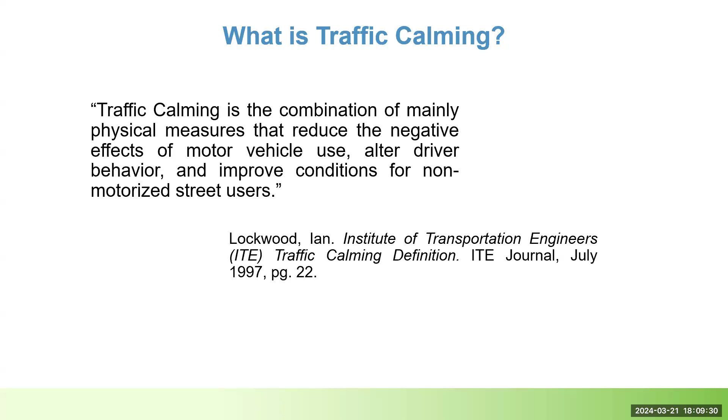The traffic calming program in Ann Arbor specifically is designed to provide residents with a formal process for engaging with the city in a partnership to perform a technical analysis of traffic concerns on local streets and then explore potential solutions using the fundamentals of traffic calming. The city has a 5-step program. Wade Trim is currently assisting with step 2 through a portion of step 5.

I'll briefly describe each of the steps, but there is a guidebook available online. You received a very tiny printed version of it in the mail with your initial package, but it has all the detail. If you'd like to review anything after this meeting, I'll direct you to the website a couple times throughout tonight.

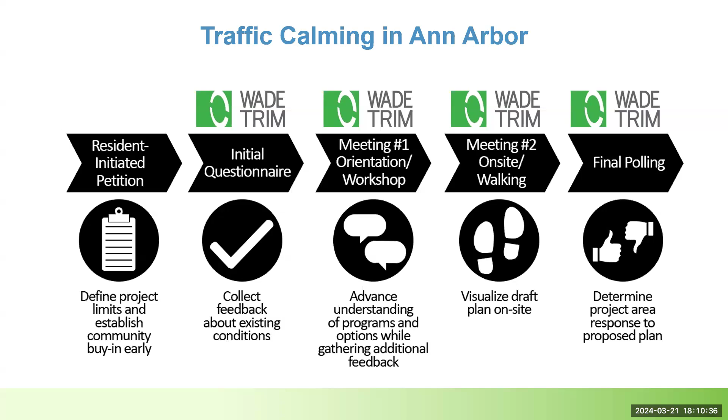So step 1 is the resident-initiated petition. For Mershon Drive, the project started with one of your neighbors acting as a petitioner, who submitted a request to the traffic calming program for Mershon Drive between Scio Church Road and Delaware Drive. After defining the project area, the petitioner gathered signatures from other residents who also live in this area. Hopefully you've had a chance to sign the petition and you're aware of the project and this effort since it initially went out.

The requirement for the traffic calming program to accept the request is that at least 50% of the defined project area must support the project, and also a preliminary technical study must result in at least 10 points based on the criteria that the city sets. Mershon Drive collected signatures from 76% of addresses, and the preliminary study resulted in 33 points. There's a breakdown of those points on our project website, but this project area is more than qualified to participate in traffic calming.

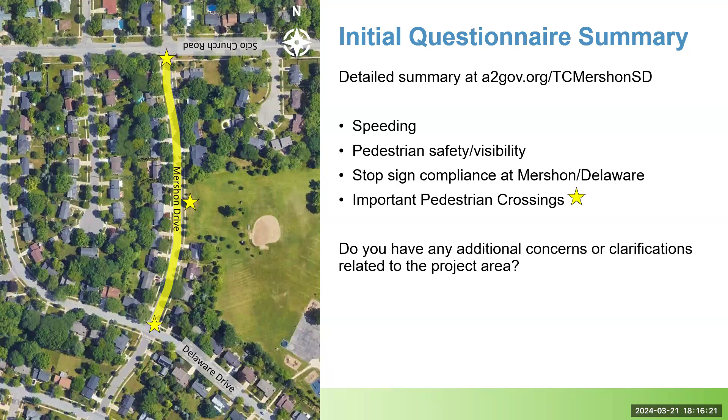Okay, don't see anything else. Keep moving forward. Oh, one more comment. Lots of kid traffic for the sports field. Oh, and walking to and from school. We've got the school nearby as well. So this is within a school zone. It's kind of cut off in the photo, but okay. So I think we've highlighted some of the main concerns with Mershon Drive.

So step three, that's where we are today. This is mostly orientation, so I'm going through how the program is going to work. But before we present the starter idea, we'll just go through an overview of the toolbox that is described in the program's guidebook. Before I do that, I'll launch another poll just to see how familiar people may be with the guidebook. If you had a chance to review it before today, or if you're just familiar with it, maybe from other projects that have been in the area.

Okay, so it looks like we're a little bit of a mix, but it seems like for the most part, people have at least been able to skim it, or if not, they're pretty familiar with how the program works. But we do have at least one person who may not be as familiar. I'm going to go through it regardless, but it's good to know.

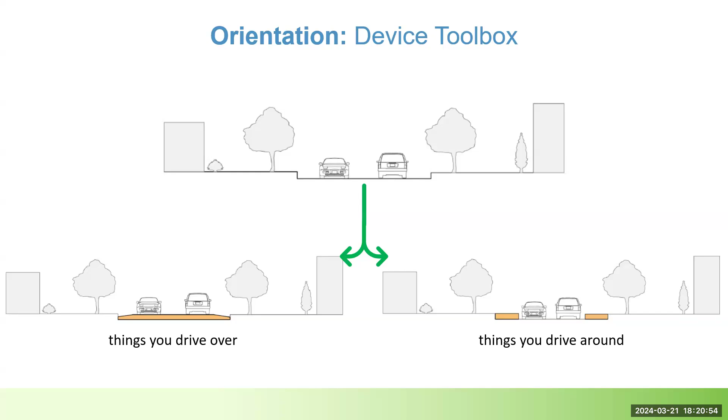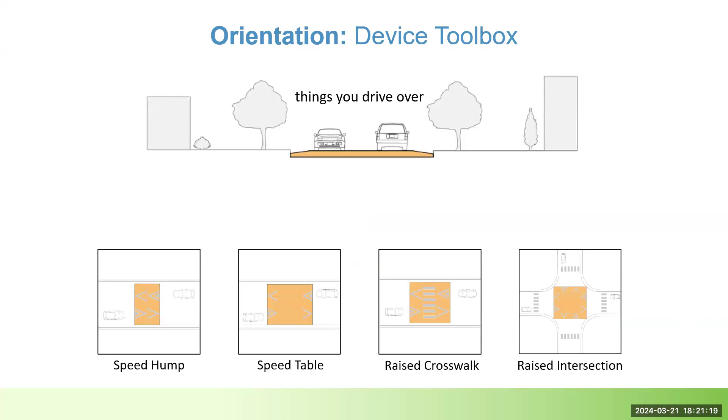So within the devices you drive over, these are devices that slow traffic by creating discomfort if traveled over at a speed exceeding 25 miles an hour. The device toolbox presents four devices that fall under this category: speed humps, speed tables, raised crosswalks, and raised intersections.

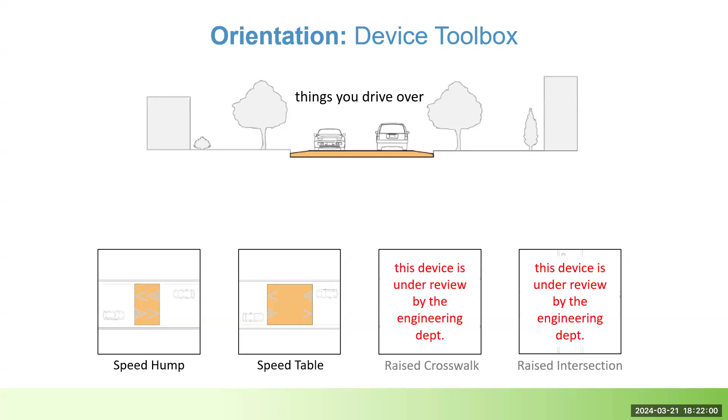Raised crosswalks and raised intersections for now are currently under review by the engineering department because we've been running into situations where we're not able to meet ADA guidelines, Americans with Disabilities Act. We're not able to meet those guidelines and make these crosswalks or intersections compliant. So for now, they're under review. Not to say that they won't be a possibility in the future, but for now, we're not able to propose these devices.

There are a couple other notes regarding speed humps. So that height, 3 inches, the maximum height, that's designed for the ease of bike usage and bike safety. I know there are examples throughout the city where speed humps were installed prior to that standard, and sometimes that's used as a reference. As of now, with the city standard, they will not make exceptions for that. The goal of a speed hump is not to destroy someone's vehicle, and at the same time, we have to balance safety for all road users, including bicycles.

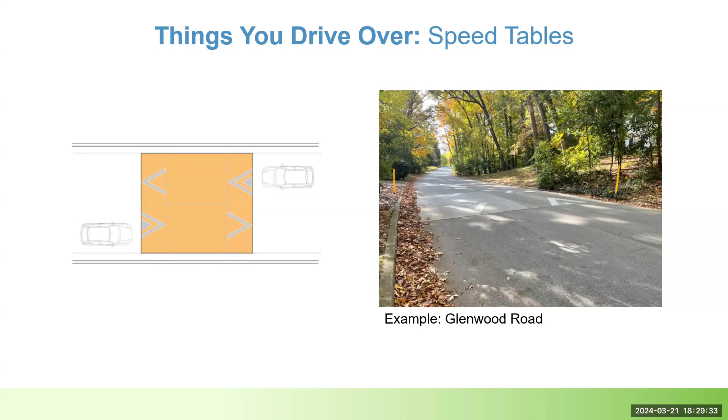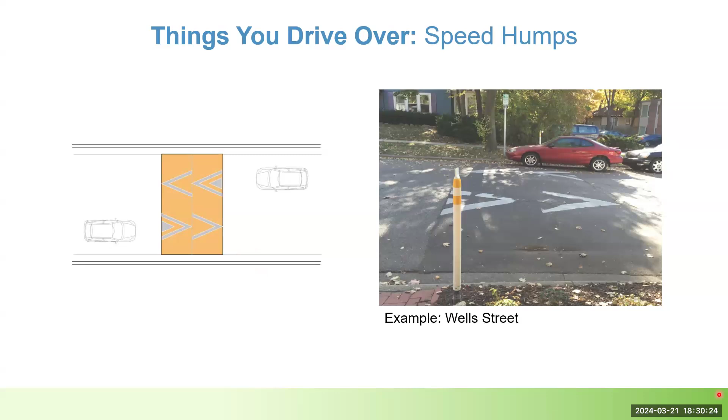And then I'm sorry, Bob and Jan, I didn't know if there's anything else that you had wanted to add on your experience with Wells Street. No, thank you. Okay, thank you. I didn't see any other questions pop up in the Q&A. I'll go ahead and move on to the next section.

Things you drive around. So this is the other group of devices that are in our toolbox. These are things that you would drive around. This type of device slows traffic by creating a perception of less room for error, to visually or physically narrow the roadway. When that happens, there might be a perception that the road is narrow, but we're still making sure that there's adequate room for vehicles to travel.

Oh, and I did get a comment, just a correction, that a few years ago, Ann Arbor Public Schools was using Mershon as a bus resting spot prior to pickup. Okay, thank you for that context. I might have to reach out to public schools just to make sure we're aware of all of the activity that they might have on Mershon.

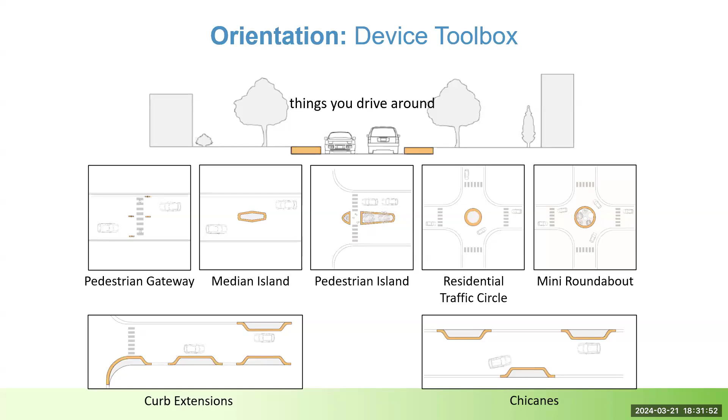But in the device toolbox, there are actually 7 devices that fall under this category of things you drive around. We are restricted on quite a few of these devices to meet standards for the fire department. Roads have to be pretty wide for some of these devices, because the fire department needs at least 20 feet of flat, unobstructed roadway. So that takes away a lot of the devices from the toolbox, but we've got curb extensions and chicanes, which are just a different arrangement of a curb extension. That is something that we're able to use.

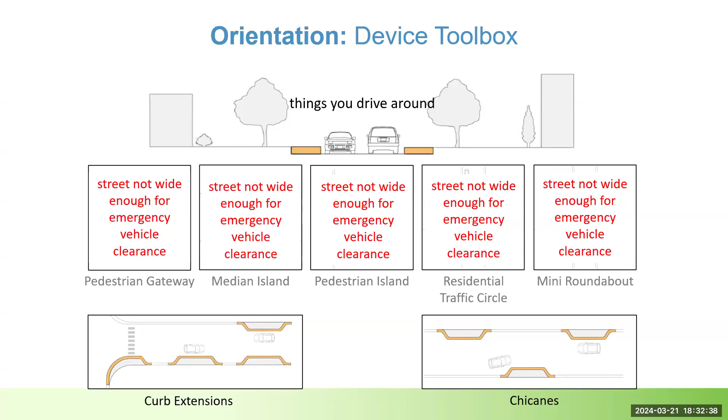And these 2 slides are a little repetitive, but curb extensions, they can be used in several designs: curb bump outs, mid-block bump outs, and chokers. So shown on the right is an example of a bump out at Granger Avenue and White Street. Curb extensions, they just act as an extension of the curb line to physically and visually tighten the corridor by narrowing street width. Not by a whole lot, but enough that you're aware of it when you're driving.

If you do one on each side, 2 parallel curb bump outs, that can be used to create a choke point, or a single lane width passageway. If you alternate them, that would be a chicane effect. With curb extensions, you do have to consider drainage, because you are shifting where the gutter would be. They may require loss of on-street parking. They can cause debris to collect around the device, just because the typical drainage flow is interrupted. So leaves or debris may collect and need maintenance more frequently.

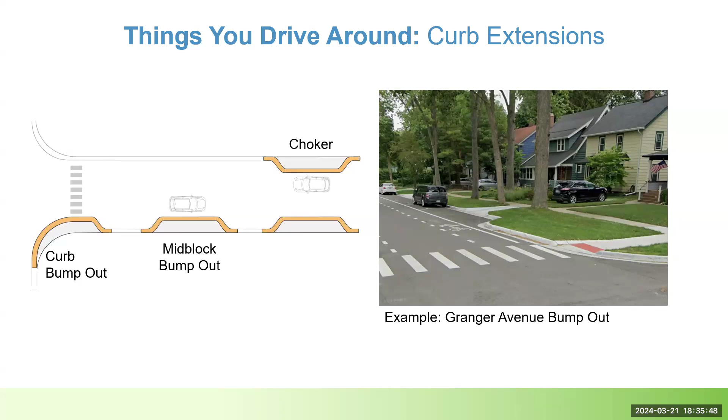If we install a curb extension either at an intersection like the example in Granger, or mid-block, in the middle of a street, this can help shorten pedestrian crossing distances. It can improve pedestrian visibility, and it can also help eliminate illegal parking. So sometimes there are issues where vehicles are parking too close to the intersection, and it makes it difficult to see other vehicles or pedestrians or bikes. So it can help alleviate that as well.

And then this is just an example of that chicane, that alternating bump out that's also within this family of curb extensions. I didn't have an example from Ann Arbor, so this one is from the Virginia Department of Transportation. But like other curb extensions, chicanes do require drainage consideration. They can result in loss of on-street parking. They can require more maintenance because of the debris that may collect, although it looks like this one might have been installed so that there was still space in the gutter for drainage to flow through. And they also have to maintain 20 feet for emergency response vehicles.

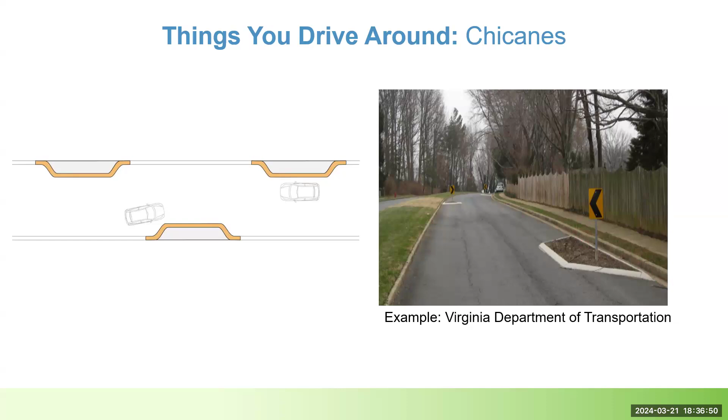And then one last device here. This is the neighborhood gateway treatment. This would be a physical landmark that just indicates a change from a higher speed road to a lower speed residential or commercial area. Neighborhood gateway treatments can increase awareness for residential speeds, but they may also require additional right of way. So if there's not a lot of city owned space for this installation, where it encroaches on someone's property, there would have to be agreements in place for that installation. Any kind of landscaping or installation maintenance costs would actually fall on the neighborhood or the adjacent property owner.

So it is an option, specifically with this project. It wouldn't be impossible, but given the surrounding neighborhood on Delaware, and then just the change in speeds between South Church and Mershon, we don't see it being super effective, but just to make you aware, or if it's something that people want to explore further, just wanted to make sure to share it.

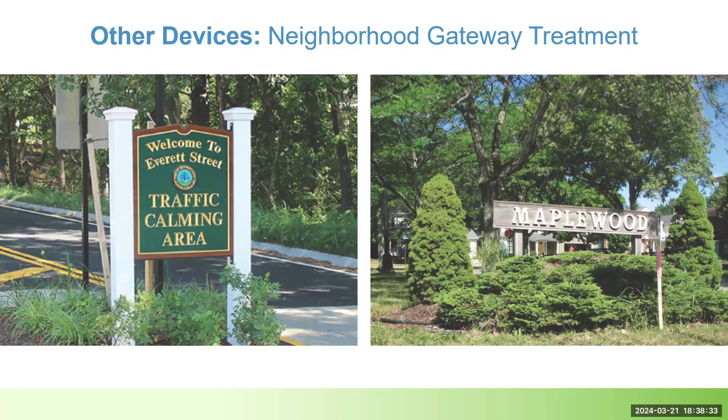So again, I'll pause if there are any questions about devices you drive around. You can feel free to use the chat or raise your hand.

Not seeing any activity, so I'll keep moving forward.

If you want to see more examples of the devices that are in the toolbox or the toolkit, there's an interactive map that you can visit at the A2Gov traffic calming website. There's an interactive map. You can see all of the other traffic calming projects that have taken place in the past, ones that are still in progress. This is an old image, so I don't believe Mershon's included. Oh wait, I think that's Mershon right there. But you'll be able to see all of the other projects that have or are going on in the city.

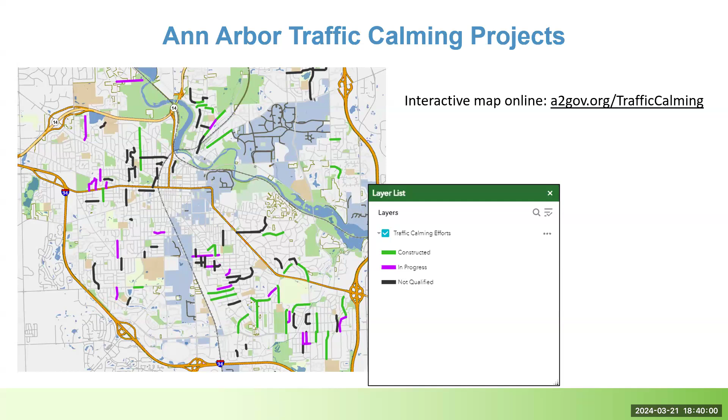So moving on, we'll present the starter idea, which is just a draft plan that we've created based on engineering judgment, existing conditions on Mershon, the data collection that's taken place in the preliminary study, and the feedback from the initial questionnaire, as well as the feedback that was provided in the initial petition.

There will be opportunity to ask questions, to discuss each device, discuss any changes you might want to see, just keeping in mind that the project is limited to only the devices I just reviewed. And it's also subject to additional engineering and design. So this is just a starter idea. It's just a launch pad for conversation.

So here it is. What we're proposing as a starter are 3 speed humps throughout Mershon. I'll point out, if you haven't had a chance to look at any of the results from the petition's point qualification, the matrix of points, like I said earlier, Mershon received 33 points. There is a breakdown of it on the website.

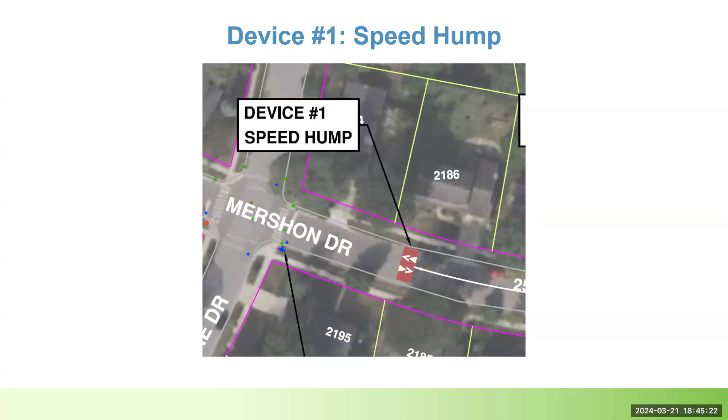And then 250, 300 to maybe even like 500, maybe a little wiggle room around that, is the spacing that we would stick to for a desired speed limit of 25 miles an hour, just because we don't want to give any vehicles too much room, because sometimes it's perception, but a lot of times it's reality where someone slows down to go over a speed hump, but then they pick up speed right away. So they try to race between the speed humps. Again, sometimes that's perception, other times it's reality.

So when our goal is 25 miles an hour, we don't want to put so much space in between the devices that people do have a chance to maintain higher speeds, but at the same time, we don't want to just fill the entire roadway with speed humps and put them so close together that you're just crawling along the street. And it might be nice to keep people out if we were able to use these as cut-through deterrents, but you'll have to consider as someone who lives on the street that that's probably not something that you want to have to experience daily.

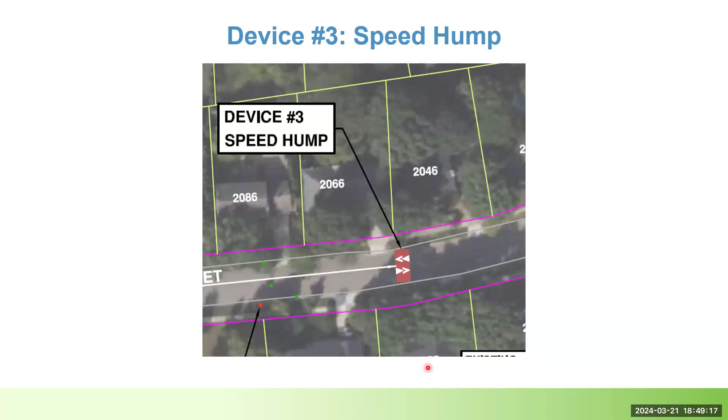And then the third speed hump is near 2046 and 2055 Mershon, although the address is cut off, I apologize. And as I said before, I know pedestrian traffic is a huge part of this street, with the park, and I know mid-block crossings were pointed out as a concern in the initial questionnaire. Unfortunately, new crosswalks and new ramp connections aren't part of this program. So I can understand if there may have been an expectation to see some new crossings mid-block here. But for now, these devices that we're proposing are targeted at reducing speeds, since the data that we had collected showed that there is a speeding issue here. So we believe these speed humps will help lower those speeds.

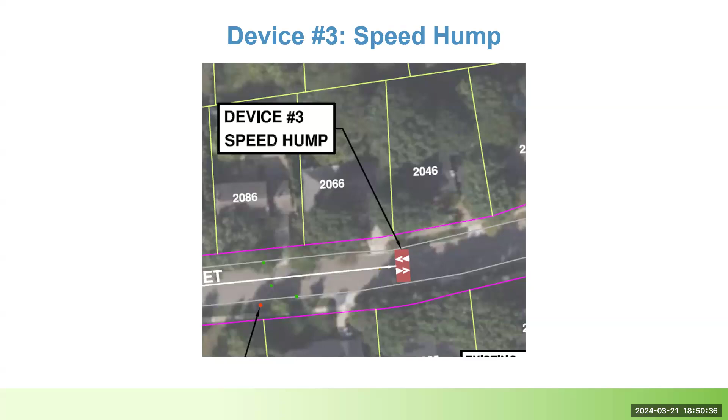The next couple of slides will just be polling on how we feel about each of the devices. But before I do that, I'll stop again. Were there any questions about the devices, or on why we didn't choose other devices, or maybe if there are mixed feelings about them, or other things that might have been preferred? Bob and Janet, I see you've got your hand raised. You can go ahead and unmute if you'd like.

Are humps preferred over tables in this length of an area? I was wondering how it is that the hump was chosen rather than a table. Oh, sorry, I might have just said that a little too quickly earlier, but usually we'll only recommend a speed table when Ann Arbor Public Schools is requesting that we stick to tables for the sake of their buses. I know there was a comment earlier about Mershon being used by Ann Arbor Public Schools as bus storage prior to school release. This got sent out for this meeting. The starter idea did get sent out to all of the stakeholders, and we hadn't received any pushback or concern. But it's definitely something that we can clarify with them.

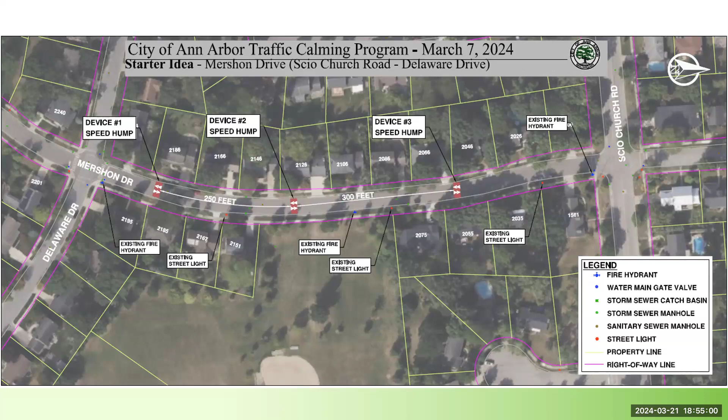And I don't see any other hands, and I don't see any questions or comments in the Q&A. So I'll move forward with the polling questions. There'll be one for each of the devices. If anything pops up, feel free, use the chat freely. Raise your hand. Don't feel like you have to. If anything comes to mind, please feel free to

reach out. So this is on device one. This is the speed hump between 2185 and 2186 Mershon towards Delaware. There's a handful of options in this poll that I just launched, but based on the question we had earlier, I didn't see anyone who wasn't part of the project area. So just looking to see if you would support this device, this location.

Again, if there's any new questions or thoughts that arise, please use the Q&A or raise your hand. And as a reminder, you can use the Q&A anonymously. Okay. So I've shared the results. We do have a couple who are not in support of this device.

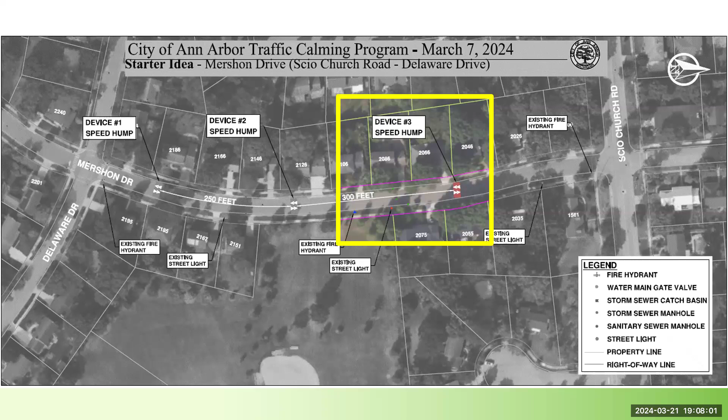So it looks like we're willing to see two devices in the plan, but it also seems like leaning toward not really a preference between the two options. If something comes to mind after the meeting, please reach out and let me know, and think about things a little more before we have our next meeting. But so that was it with the chunk of tonight's content. Next couple slides are just going through the rest of the process and next steps.

Over the next couple of weeks, we'll post today's presentation as well as a recording to the project website, and also post a summary of the polling and use that feedback from tonight and any feedback I might get afterwards within those next couple weeks, and create a preliminary plan. So that'll just be another iteration of the design on Mershon. Next step will be step 4. That's meeting number 2. It's got 2 parts to it. There's a self-guided tour and another Zoom meeting. So the Zoom meeting is scheduled for May 29th.

And for the self-guided tour, you'll receive a mailing packet at least 2 weeks prior to the Zoom meeting. I try to get them out earlier than that, but usually it's about the 2-week mark. The packet's going to contain device images and descriptions, which are pretty much the same as the slides that we showed earlier. You'll receive information on the devices that are being used in the preliminary plan or in the self-guided tour, and you can do a walkthrough of Mershon and see where those devices will be. We will mark the device locations in the street approximately at the location that we're aiming for.